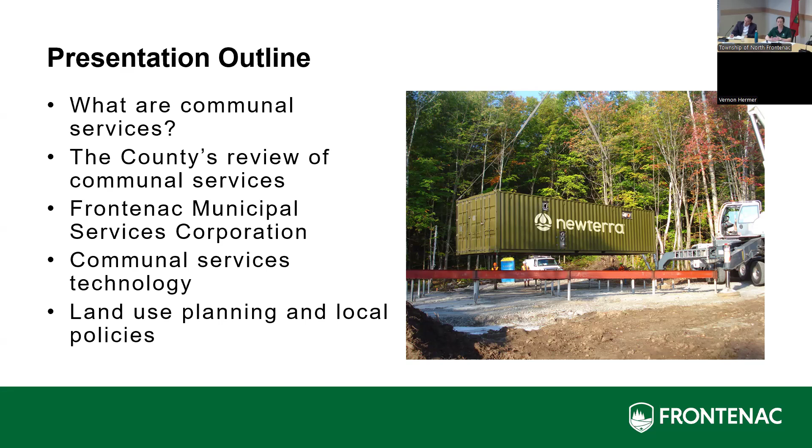And then at the end, I'm going to wrap up and talk about the land use planning side of things, which is really how can we use this infrastructure as a tool for community building and protecting our environment, so building sustainably into the future.

So in a brief nutshell, the communal services are shared drinking water and wastewater services that provide treatment for water and wastewater to clusters of residences or businesses. Sometimes they're referred to as decentralized systems. I find the engineering community refers to them a lot as decentralized. On the planning side, it's usually communal. We say both terms, they mean the same thing.

So they operate on the same basic design principles as the conventional municipal treatment systems, like the big plants that you would see in cities, except these aren't connected to a big central facility. They're basically right-sized facilities that treat water and wastewater close to where it is needed and used. Within a neighborhood, within a development, they're meant to be like little mini treatment systems on their own, and they can be added onto and scaled based on, say, phasing of a development of a subdivision, for instance.

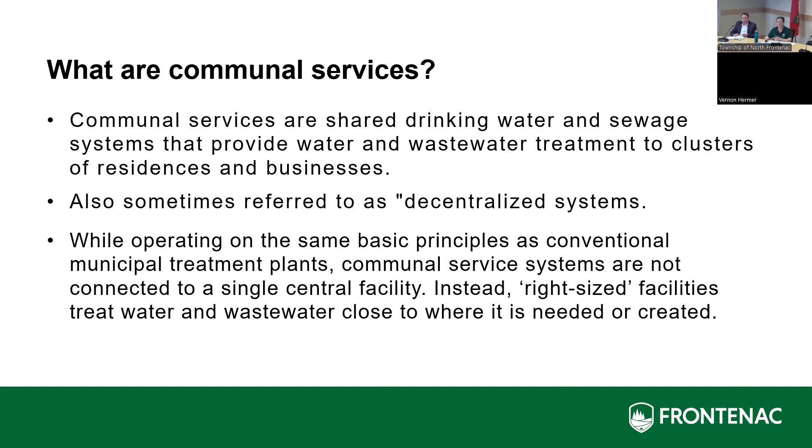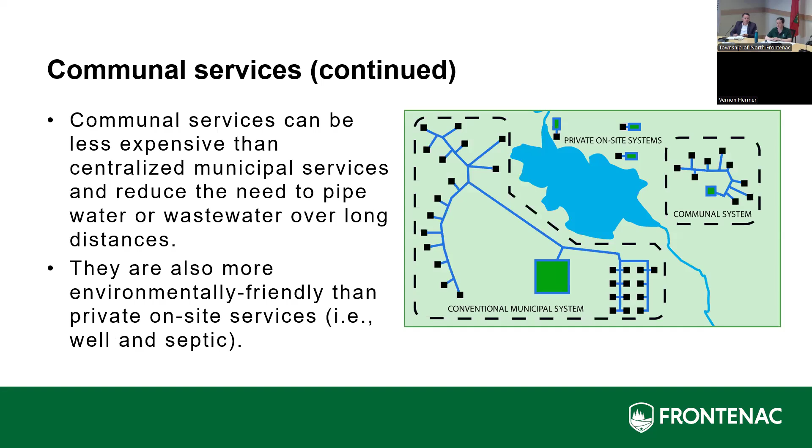Communal services can be less expensive than central municipal services, and they reduce the need to pipe the water and wastewater long distances. I live in the city of Kingston—they just did a huge addition to one of the wastewater treatment plants there, hundreds of millions of dollars. So these systems are not that expensive as that. They're also more environmentally friendly than your traditional private septic systems that you would have on rural properties.

So it was this quote here: the lack of municipal services in our villages challenges the future community viability. This is a quote from the Frontenac County official plan. And it was something that really gave us pause for thought in terms of how are we going to grow and change and develop as a community in the future? And as planners on our team, we don't think just 10 or 20 years down the road. We think 50 years and 100 years.

And thinking specifically about our rural context and about our rural villages and our hamlets—in Frontenac, we don't have any traditional water or sewer systems. The one exception is the village of Sydenham in South Frontenac. They do have piped water services, but that was installed because of a requirement from the Ministry of Environment about 25 years ago because of contamination of wells within the village. So they do have a piped water system in the village for that, but other than that, we do not have the big traditional municipal facilities for water and wastewater.

But our settlement areas, our villages and hamlets, they're very historic. The lots in them are very small. And so one of the concerns is the modern standard today, if you're going to build on a lot with a well and a septic system, is to have about 2 acres in order to do it properly and safely. So you can imagine you can't build a tight-knit neighborhood when everybody's spaced out on 2 acre lots. And that lot practice is what we currently have in our historic villages and hamlets.

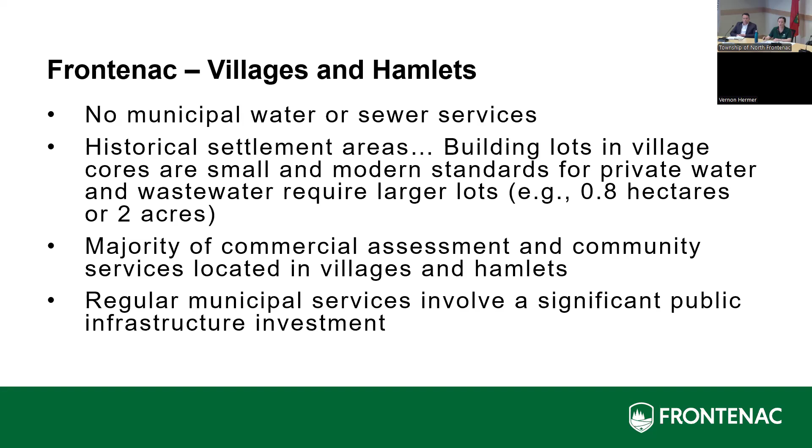They're also the areas where we see the majority of our businesses and our services, such as our schools, banks and pharmacies, and we want those services to stay there and continue to be available to our community members. As I stated, to try and service those villages on traditional municipal services would be a significant public investment that none of our townships could afford to do. So it was this idea of, well, what if we used communal services.

Communal services have been around for a long time, but they're not something that has been used in Ontario very much. We started about 9 years ago looking into this and started working with a consulting team called WSP to do a review of the technologies, the regulations, and the different governance models.

What we learned is that the technology is not really the issue. Coming from an urban environment to working in a rural environment, I had always just heard the horror stories of communal services being bad, like old campgrounds and failed systems. If a communal system does fail and a municipality is forced by the government to step in, take it over, and fix it up, that's a lot of work and money, and it leaves a bad taste in people's mouths. But what we found through our research is the technology itself isn't the problem, it's how it's maintained, monitored, updated, upgraded, and replaced when needed. That was the key issue.

But we felt by using communal services, there were a lot of advantages. We could have development on smaller lots, and we wouldn't need 2 acres for every property. That means even if you wanted to develop further in the villages and hamlets, you would be able to do so without impacting other wells and septic systems.

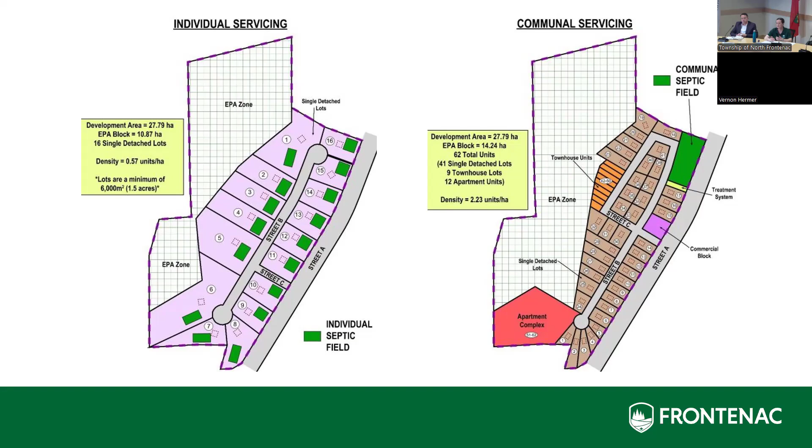This subdivision is near Inverary. So we wanted to be able to show what is possible early on with using communal services. When it comes to communal services, I see three main things that all come together in terms of how it all works. So I'm going to speak a little bit about governance and the operations, and then Brad's going to talk about the technology. And then I'm going to bring it back to the land use planning and community building tool.

So the second part of the study that we did with WSP was, okay, if we're looking at doing communal services, and if it's the operations and maintenance, what if the county and the townships took responsibility for it? How do we do that? What's the best way of doing that? So we did a governance model study in terms of how all of these operations would actually work.

So one of the roadblocks right now, and why you don't see many communal services in Ontario, and Brad will speak to this on one of his slides, is that when a private developer comes and wants to do development on communal services, the province requires them to enter into what's called a municipal responsibility agreement, or an MRA. It's basically a legal agreement between the property owner and the municipality. Essentially, at the end of the day, if the developer goes broke, if it doesn't get finished, if something goes wrong, the municipality is going to step in and take it over. It's the right thing to do, but it's a really expensive proposition for the municipalities if something does go wrong, because it's expensive.

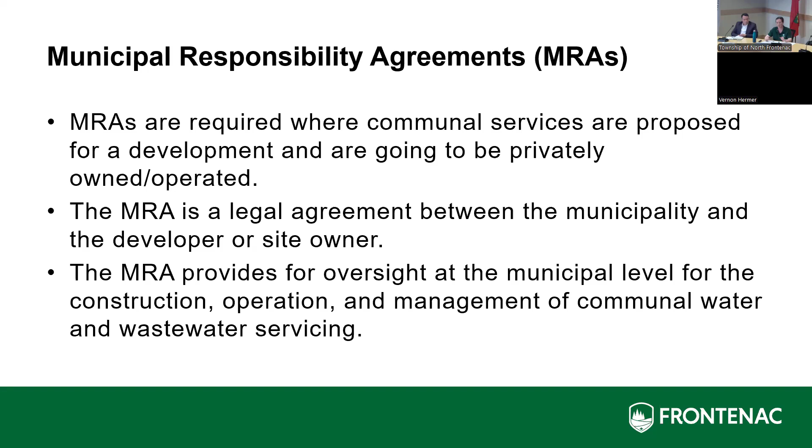So to deal with that, the governance model that the county and its partner townships found through the study, the best model was to use what's called a municipal service corporation. This is a public utility that can be created under the regulations of the Ontario Municipal Act, and there are a lot of benefits to that. You can line up across the whole county what your growth and long-term objectives are in terms of development. You can have consistent implementation across the entire region. It allows you to separate the finances, so it has its own financing structure separate from all of the municipalities. In the long term, once things get built and are operating, it also allows for profits and profit sharing. And the services and the corporation remain 100% publicly owned by all of the participating municipalities.

So to that end, that is what we did: we created a public utility, a regional public utility, to manage water and wastewater services in the county. And it's the first of its kind in Ontario. All 4 of our townships and the county agreed to join, and the utility itself was incorporated by the province back in November of 2023. Since then, the utility has hired an experienced operator on contract to assist them with developing best practices. They'll be available to help review proposed developments and eventually to maintain these systems once they're up and running and in the ground.

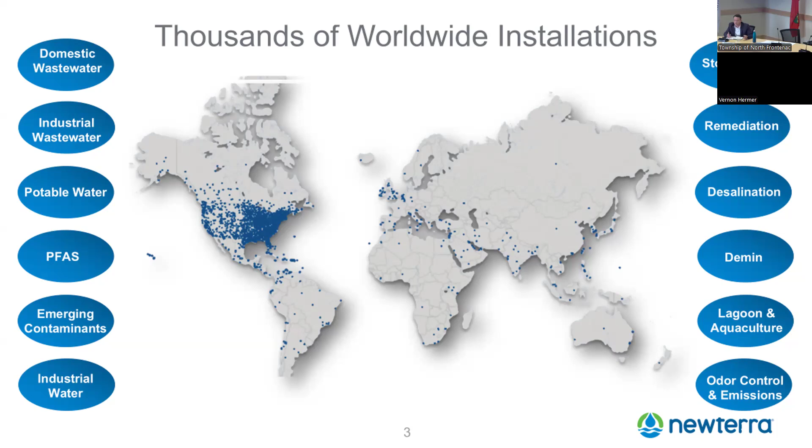Today, I'm going to focus mostly on the sewage side of things, but I do want to just touch on the drinking water side.

So although these systems are modular and scalable, meaning they can be deployed for developments that grow over time. Instead of building a $100 million plant like a municipality or city center would do, set up for a 20-year growth plan, in smaller areas with no servicing yet, these decentralized or communal plants can be deployed to allow the capital cost of that plant to be in line with the number of houses or commercial properties being built, so it doesn't burden the developer or the homeowners from an operation and home cost standpoint.

So these decentralized systems are much more cost effective, but they still use best available technologies. There are different ways to treat sewage - you can use a septic system, as you'd typically see in a rural area, or you can also use lagoons, which small villages have.

They're probably one of the worst types of technologies from the standpoint of treating nutrients. Nutrients in the wastewater that we produce as humans have certain constituents like phosphorus molecules, nitrates, and ammonia that get into our waterways and harm the environment. There's advanced technologies available that remove those nutrients, but some of the older technologies you're probably familiar with, like septic and lagoons, don't have those advanced features.

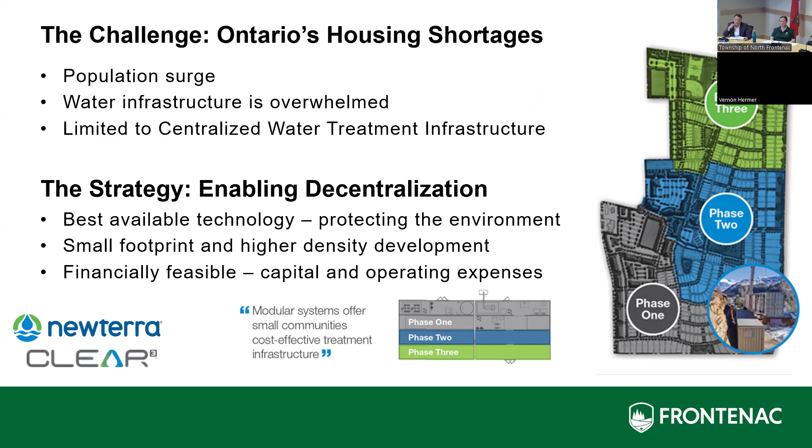These are just some decentralized facilities that Newterra has installed. There are hundreds of decentralized facilities in Ontario of different types of technologies, but there have been quite a few headwinds in Ontario for getting these systems in. It's really right around the regulatory process — as a province, we're very set up as a centralized type of treatment province.

In the US, for the last 20 years, they've been doing decentralized along with centralized treatment. There's a bit of a shift in the mandate we're seeing over the last few years. We've been doing this for about 20 years, and in that time we have 40 systems in Ontario. To put this in perspective, we started in Colorado 2 years ago and already have 18 systems there. So it's really not a lot — there should be a lot more of these around the province, and it's just a matter of the regulatory process being streamlined and designed for decentralized systems, not these mega plants that cost hundreds of millions of dollars.

What we decided back in the early 2000s, when we decided to adopt MBR as our technology — we didn't invent it, we adopted it. We looked at advanced countries in the world using this technology for large mega plants, like Singapore, which reuses a lot of their water. We said we're going to take this technology but put it in a smaller form factor and target these decentralized facilities.

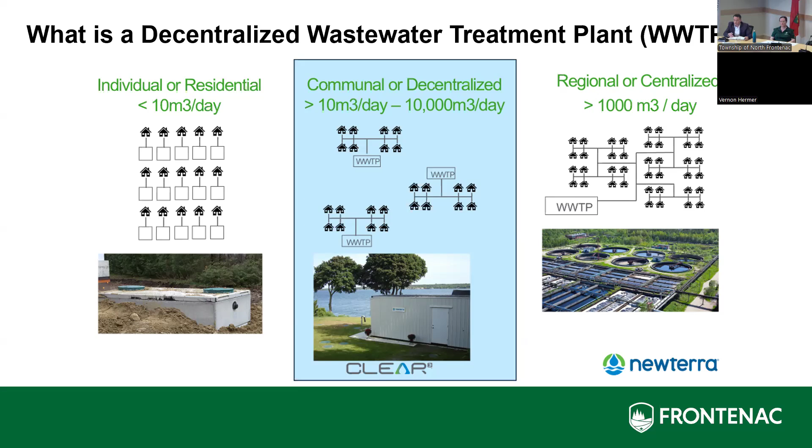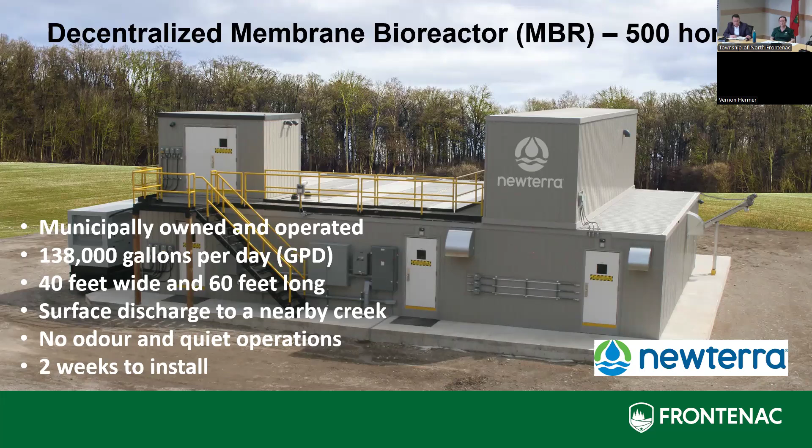Just to elaborate a little on the ECA and EA process - I'm using acronyms - but under the Ministry of Environment, the policies for approving and getting a decentralized or communal plant in place can typically involve a process that can take up to 3 to 5 years, and sometimes even longer. The reason is the regulatory process is set up for centralized plants - building a hundreds of million dollar plant that's going to treat tens of thousands of people.

With decentralized systems, they still have to go through that same process, which takes a lot of time. There's a lot of unnecessary checks and balances that are put in place that don't make sense for the smaller package systems. There's a movement within the Ministry of Environment to improve that, and we're seeing tremendous progress in the last couple of years, thanks to Frontenac County, to be honest.

The EA process is really that front end piece where they're trying to evaluate different technologies, and that can take 2 to 3 years, maybe 4 to 5 sometimes. Then the ECA is that document that you're left with at each facility, no matter where it's located in Ontario. There's an ECA.

It's an environmental compliance approval, and that report or permit has very strict rules within it. It dictates how clean the water has to be, where you're going to put the water, what level of operator has to be licensed to operate it, whether there's a backup generator - it has to have a backup generator - to everything from how frequently you have to take water samples and reporting. These systems are monitored and policed by the Ministry of Environment.

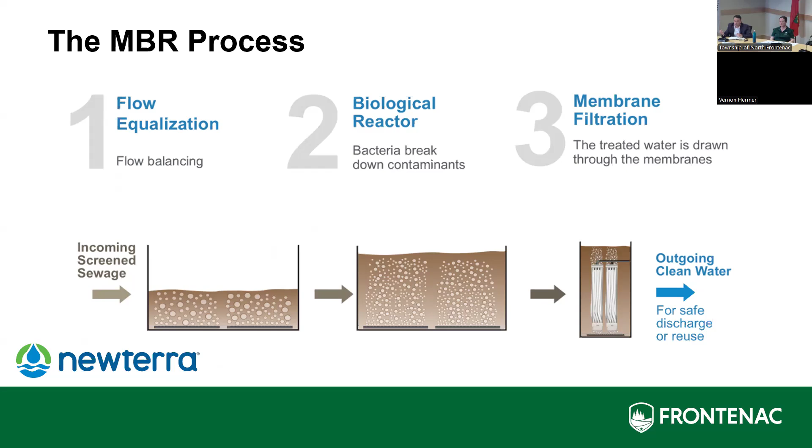So essentially most of it's water. What we do with that hollow fiber is basically extract the clean water out of that 1% solid chocolate milk.

Inside that mixed liquor we have fibers, combustion particles, phosphorus molecules, hydrocarbons, bacteria and viruses—all the stuff we don't want in our waterways. The nice thing about an MBR and its technology is it creates a physical barrier, actually preventing any of those constituents from getting through and into the environment.

That's classified as what we'd call an ultrafilter—a very small pore size that won't allow any of those other things we don't want through, except for clean water.

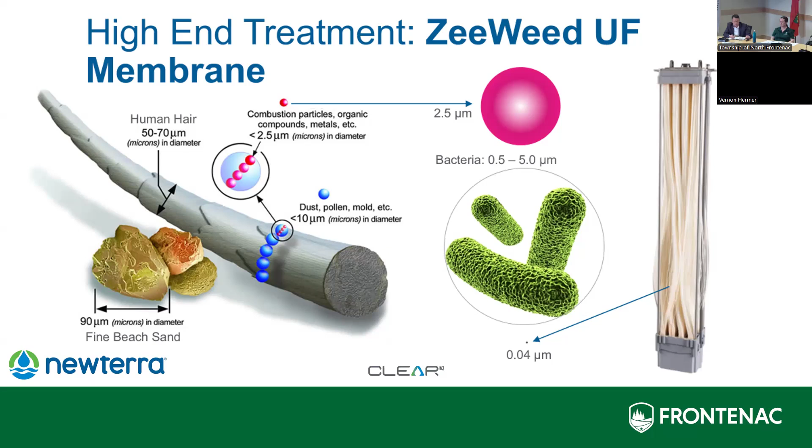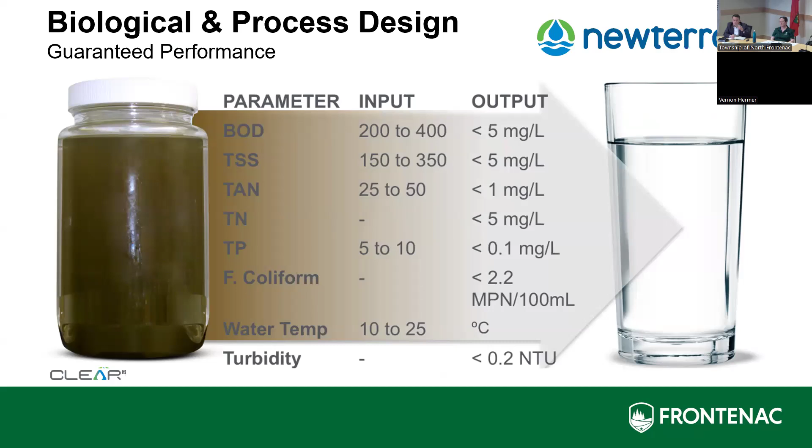To prove this technology, we did a demonstration of toilet to tap. At our factory we got 100 people there, probably a third or a little more work in the factory, in the shop, building these systems. We put up some bathrooms and connected to one of our packaged systems, then put the output through a reverse osmosis. Then we pulled all our board members and said, put your money where your mouth is, have a drink. And they did. They're all still here with us.

So yeah, the technology works, there's no question. But just like Sonia said, it's really about all the parameters around operation and maintenance, making sure these things are taken care of. They're not a septic system where you set it and forget it. But remember, you're removing a tremendous amount of nutrients, protecting the environment - we're building communities for our future generations and protecting their water and ours as we use it.

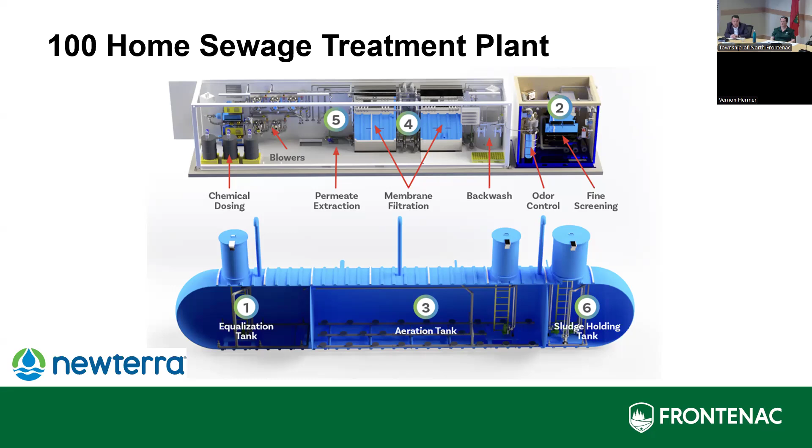Then you've got an in-ground tank. The water that is cleaned - the sewage that goes in at one side, the output being water - can go directly to the creeks, rivers, lakes, and streams. We have these systems going into very sensitive policy 2 receivers, into Lake Muskoka, all over the country into different areas of water. Because there is no bypass, unlike a municipality which has advantages in some cases - big cities can turn a valve, and if they get a big rain event, they can just bypass and send it out to Lake Ontario or wherever. These systems don't have that advantage. They are bound by the membrane - the water has to go through the membrane before it can get to our environment. So it really provides guaranteed protection.

Just a couple examples of installed systems in Quinte West, going to a very sensitive receiver in the Bay of Quinte. You can see the stainless steel tanks on the right side, where the membranes are. This was bought by a developer - it's a 500 home development. It's treating sewage for a school and for the 500 homes, then discharging the clean water to the Bay of Quinte.

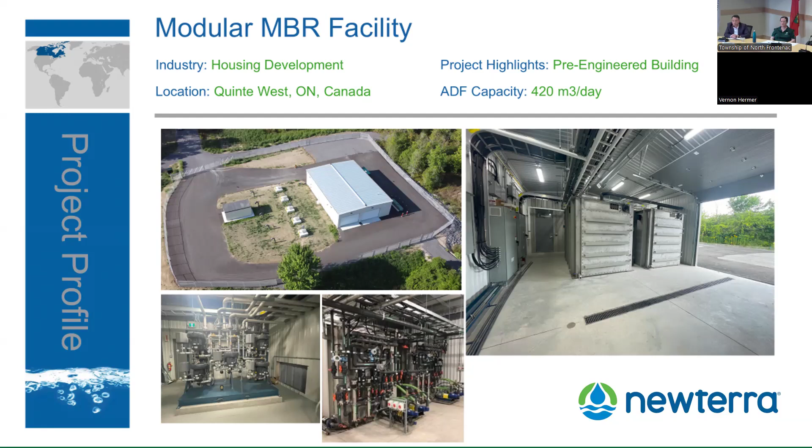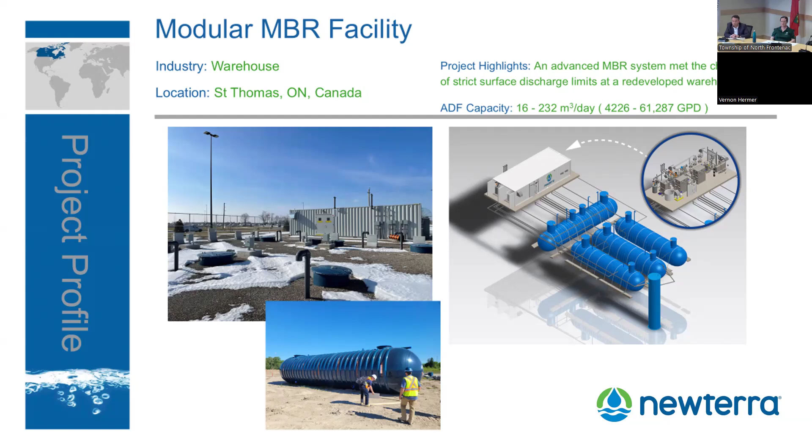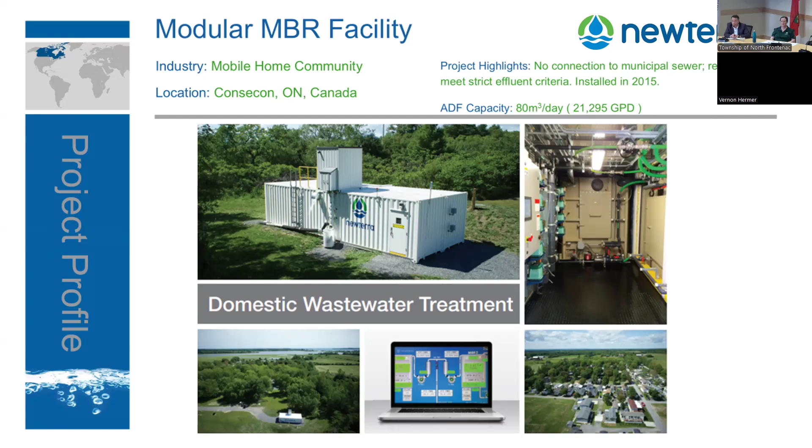That's pretty much it from a standpoint of the technology. It's very simple in the sense that it's always the same, whether it's treating 10 homes or 10,000 homes - the process is identical, just a little bigger or with a few more components. If you have any questions, I can answer that. Sonia's going to have a few more slides.

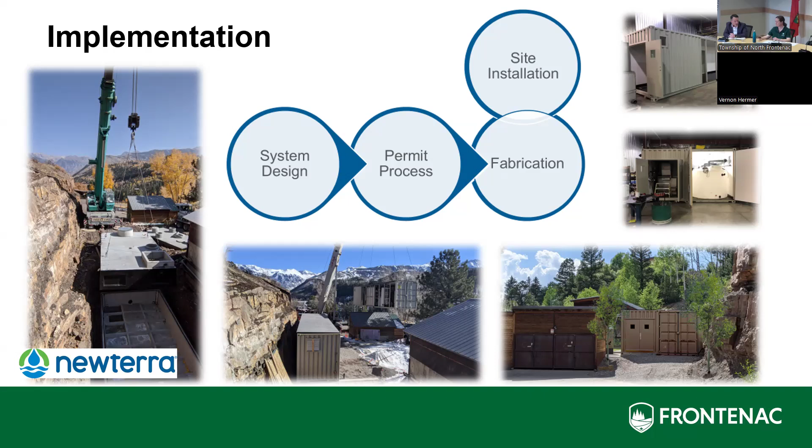Missed a slide, my apologies.

From an operations standpoint, as you can imagine, these aren't septic systems to set it and forget it. They have to be maintained, and that's dictated in the ECA I talked about. So the Ministry of Environment will determine the level of operator that has to operate it, and they go to site and basically once a week check on the system, take the reports, and they're the operator of record for these systems.

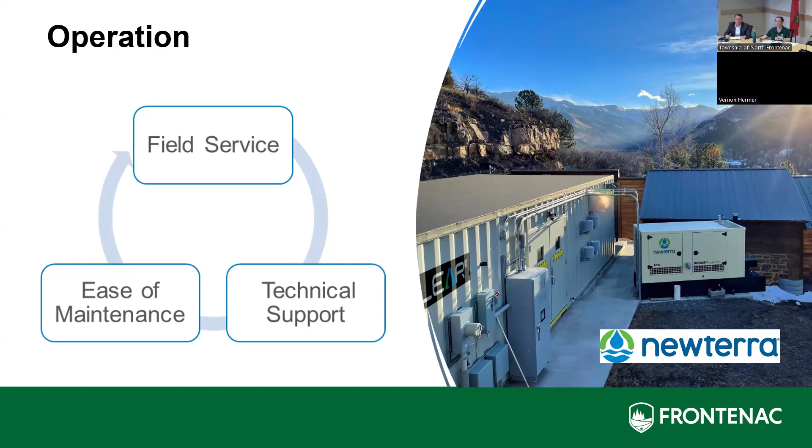Great, thank you Brad. Just a few more slides. So just to bring it back in terms of the county and the township, and really the idea that communal services can be a tool for sustainable community building. I'm going to touch on a couple of local examples in the works here.

This first one is the mixed housing master plan taking place in Verona in South Frontenac. This is a municipal owned and led project where they are looking at developing a mix of townhouse and small apartment units within Verona using communal services. It's going to be a mix of social housing, market rate housing, so it'll be a really diverse mix of affordability as well as the tenancy in terms of who is going to be living there.

They are in the process of doing their environmental approval, and I think right now, based on the numbers, they're probably going to end up with about 80 units across the housing master plan area that they are looking at.

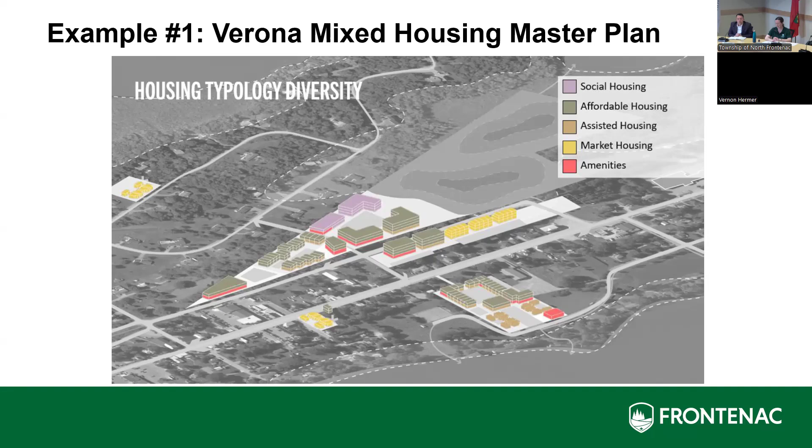The second example I'm going to share is a 2-acre site in the village of Sharbot Lake in Central Frontenac. This is the site of the former public school that was there. There is a new public school, it didn't leave completely, it's just moved down the road.

As a planner, Sharbot Lake is what I like to call a complete community. It still has a grocery store, a pharmacy, a bank, the library, some restaurants, school. It's got all of those services that the rural area needs to serve all of its citizens that we want to see stay there. This site itself being 2 acres is right in the heart of the village. You walk down to the end of Garrett Street and the pharmacy and the grocery store are right there.

The township bought the site with the intention of using it for seniors housing. Originally they were going to use the existing well and septic on the site and would have gotten about eight units. We said to them, what if we use communal servicing? What is possible with communal servicing? So we worked with them to get some funding from the Federation of Canadian Municipalities to do a feasibility study.

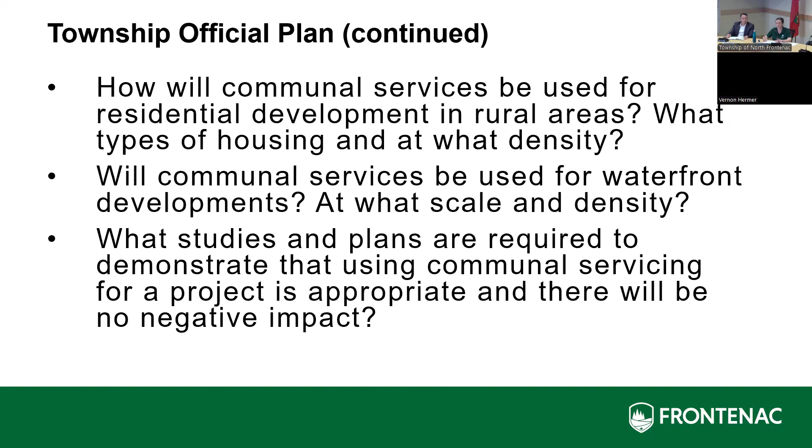And ultimately, the official plans need to set out what studies and plans are required by a developer to prove that communal servicing for their particular development is appropriate and that there will be no negative impact.